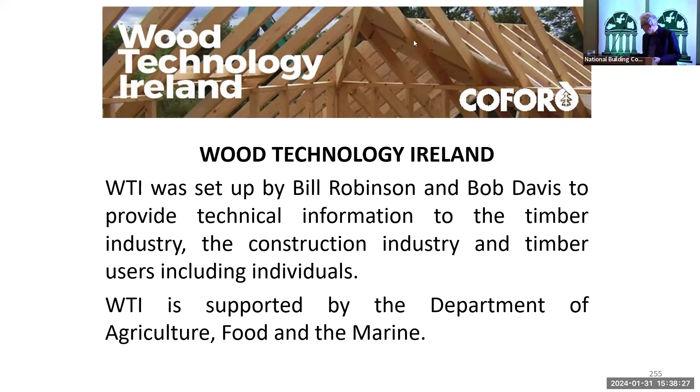Materials testing, including sampling. Sampling is actually quite a bit of a problem. I looked a lot at sampling in terms of plywood, and it's a nightmare. Sampling in terms of testing, it depends on what you're testing for. Are you going to test it for compliance with the harmonized specification, or are you testing the material that's arriving on site? So it's a limited population.

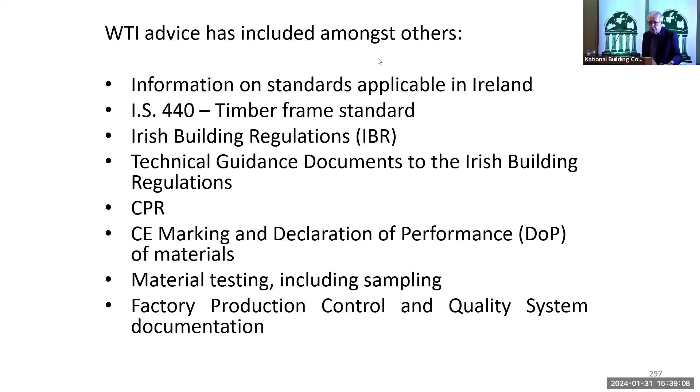Factory production control and quality system documentation is also something we've advised on. It'd be a mistake to think that factory production control will guarantee a product. It reduces the risk of that product not complying.

Factory and site inspections, reviewing the second generation Eurocodes. Well, this is the normal temperature, this is fire design. This is a new thing, all the Eurocodes, concrete, steel, and so on, will have this, which is to do with execution, which I'll talk about shortly. But here are the contact details. And just bear in mind, we can talk to anybody about anything to do with timber, really, okay?

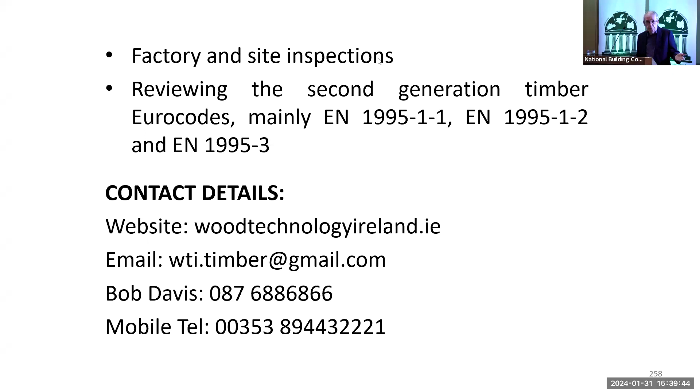So a brief history. Around about 2000 or so, a timber frame study was undertaken by the Timber Frame Housing 2002 Consortium. I think that's the date when they produced the report. TRADA were the main project consultants, and timber frame that's used here is the same as that used in the UK. So they just confirmed what good practice was, as was being used in the UK.

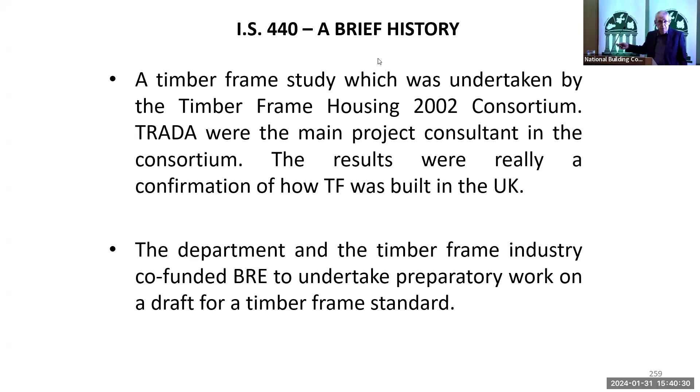The Department of Environment at the time and the timber frame industry, mainly the ITFMA, co-funded BRE to undertake preparatory work on a draft for the timber frame standard that would become IS 440. So a draft was submitted to NSAI, and the working group eventually produced IS 440, which was first published in 2009. So here are, you know, the responsibilities, which is actually quite an important part, but hopefully it will be revised and improved upon when the standard is revised.

Materials are important. It was one of the reasons why 440 came into being. The department were particularly concerned about site practices, which 440 covers, but obviously having a limited standard would not be good in the context. There's a lot behind timber frame because it's prefabricated. It has to be designed, has to use the right materials. Construction details here are important, and site work also is important. So manufacturers are there as well. So just concentrating on site work would not guarantee a good building.

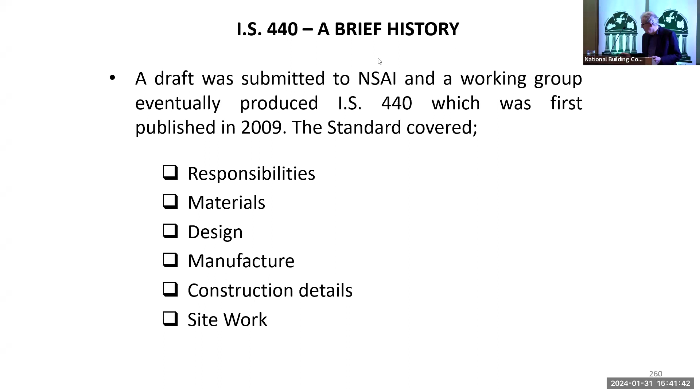Again, materials are very important. Services were introduced, mainly dealing with service cavities in certain situations, and differential movement, which is where timber, as it dries out, will shrink, okay? So if you have block work, concrete stairs sitting on block work, whatever, there's going to be differential movement. So you have to cater for that, which 440 covers.

And there are ways of reducing differential movement. If you use engineered wood joists like steel web joists or I-joists, you're going to reduce the amount of differential movement. Controlling the moisture content of the timber will also help to control differential movement.

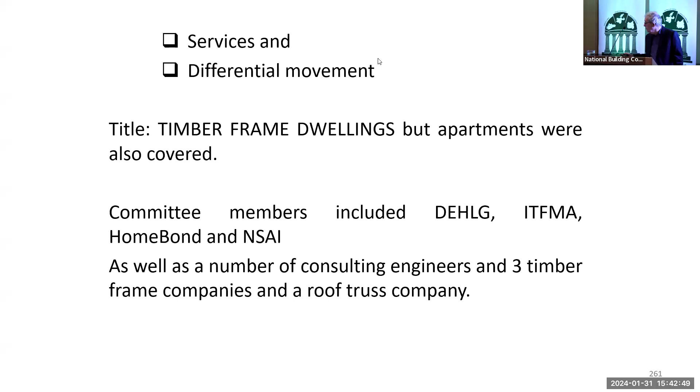The title of the 2009 document is Timber Frame Dwellings, but apartments are also covered. And the committee members included the Department of Environment, the ITFMA, HomeBond, and NSAI, as well as a number of consulting engineers, three timber frame companies and a roof truss company. I was involved in that as well, so I would have been under the consulting engineers, presumably.

Scope, this is roughly the scope, and it hasn't really changed that much, okay? It was revised in 2014, but there was only a limited revision. The new one will be similar in scope actually, but it's a platform method. You put a wall up and then you put the floor on, then you put another wall on, another floor, etc., or roof. There are other methods.

There was a volumetric development in Poppintree in Dublin that was tried out, which was from a company from the north. It did have a reputation for volumetric building. I don't think it worked particularly well, but I think also that they had lost their skills in that area. Volumetric looks good on paper, but it takes a lot of care.

Maximum of 60 minutes fire resistance, that's fair enough. The maximum 4 storeys, these come from the technical guidance documents. But certainly the maximum height of 10 meters does. So that's 4 floors, 3 storeys. The maximum 4 storeys is sort of a natural limit, because once you go above that, you're into disproportionate collapse, which has a lot of difficulties trying to obtain in timber.

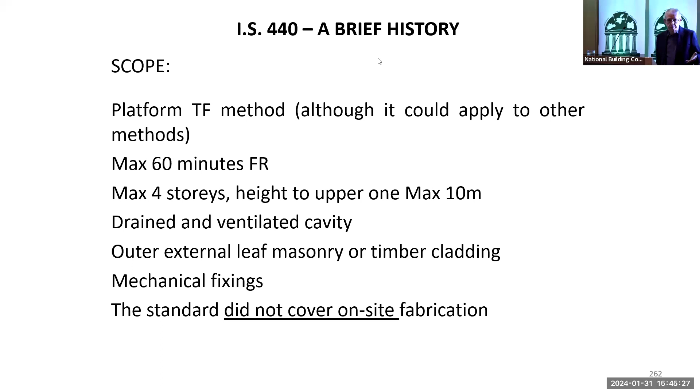Mechanical fixings, there's two ways really, at least in terms of manufacture. There was a draft EN that was proposed, and one was mechanical fixings, which is part 1, and part 2 was for glued panels, which is where the OSB, for example, would be glued to the timber framing. The standard did not cover on-site fabrication. The amount of on-site, stick-built fabrication that takes place is very, very small, and probably unlikely to come to the attention of building control.

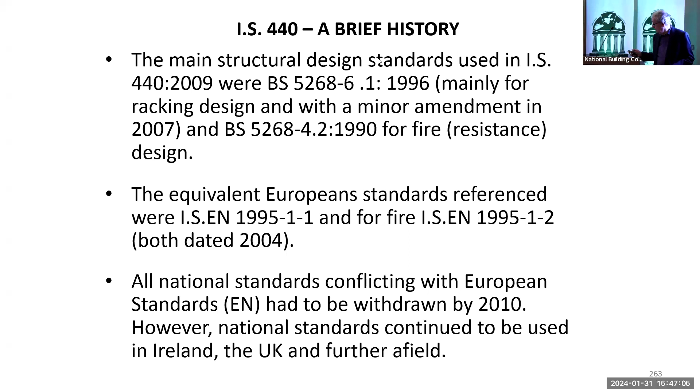The European standards are very good, by the way. The European standards were not really used until about 2013 or so. We actually had to have a meeting with some of the system owners in terms of roof trusses.

Oh, the microphone, sorry.

They were continuing to use designs to the BS, and of course Britain always had this ambivalent attitude to the European Union. So we had a meeting with them and told them that they have to design using the Eurocodes. A couple of the system owners didn't have their software updated to the Eurocodes, but they were given a period of time.

This limited amendment in 2014 removed any of the conflicting standards with the European standards, leaving only valid standards. All standards are supposed to be voluntary, but in reality, of course, they're not. The withdrawn standards primarily were BS 5268, the fire testing one BS 476, and BS 6399 loading. All of these have European counterparts.

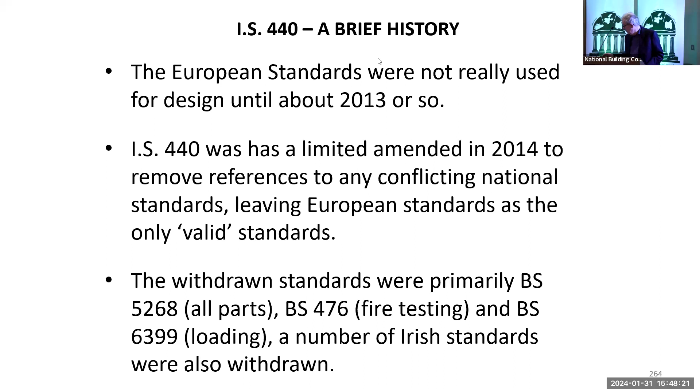There are also a number of Irish standards withdrawn: SR 70 roof trusses, SR 71. These sort of replaced the ones that were withdrawn. The SRs could have come out earlier as SWIFT documents, but because they hadn't gone for public comment, the Department of Environment weren't happy with that. But these are essentially codes of practice, unlike IS 440, which is a full standard.

The difference between a code of practice and a standard is that the standard will say 'shall', a code of practice will say 'should', and we still use that terminology today. In fact, the Eurocodes have been revised. They have other terms like 'may', 'shall', 'should', and they're all recommendations and requirements. So these three standards, including 440, are non-contradictory complementary information to the Eurocodes, because you can't have something that conflicts with the Eurocodes.

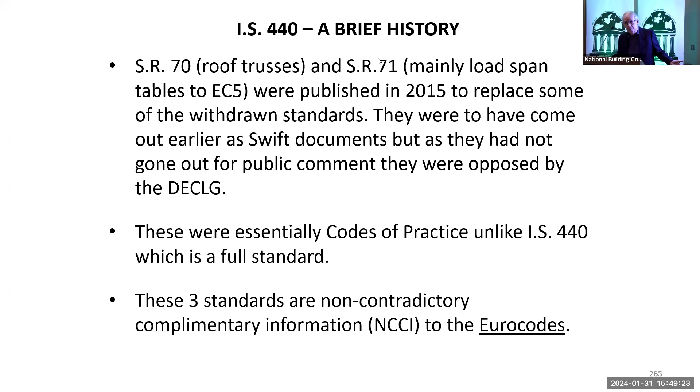But during that work, leading up to the 2014 amendments, it was realized that a larger revision was needed, so that work started and is still ongoing. The CPR required compulsory CE marking and provision of DOP. This is for materials, not for the timber frame per se. So that also had to be addressed, and that sort of slowed things down.

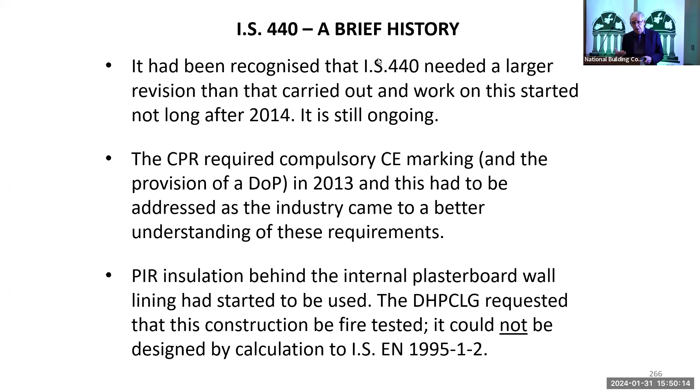PIR insulation was being used by the industry behind the plasterboard lining. So the department then requested that this construction be fire tested. It could not be designed by calculation to the Eurocode, because the Eurocode assumes that the fire lining is fixed timber, and in this particular case, it's PIR.

So work on the standard was delayed while the fire tests were carried out, and those tests commenced in August 2017. With encouragement, the fire tests were extended to cover a range of timber constructions, some of which could have been designed by calculation to Eurocode. Technical Guidance Document B, Volume 2, was published in 2017, and then that had to be looked at.

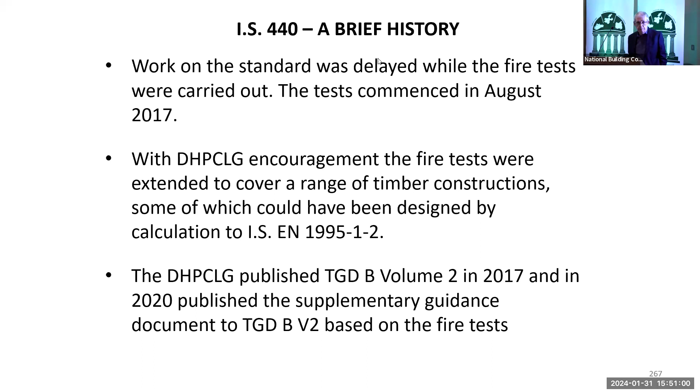In 2020, the Supplementary Guidance Document to Volume 2 was published, based on the fire tests carried out largely by the ITFMA, the Irish Timber Frame Manufacturers Association. The 2020 Supplementary Guidance Document was based on the extensive fire tests, as I mentioned. It collected together a number of earlier circulars and guidance documents based on fire tests - one on walls, trusses, and floors.

The revision of 440 started in earnest around 2019 before COVID disrupted the committee work. NSAI tries to get consensus in its committees, in other words, trying to get agreement with everybody. If it's not possible, then the clause might not be changed in an amendment, or NSAI will have to make a decision not to do something, or to do something.

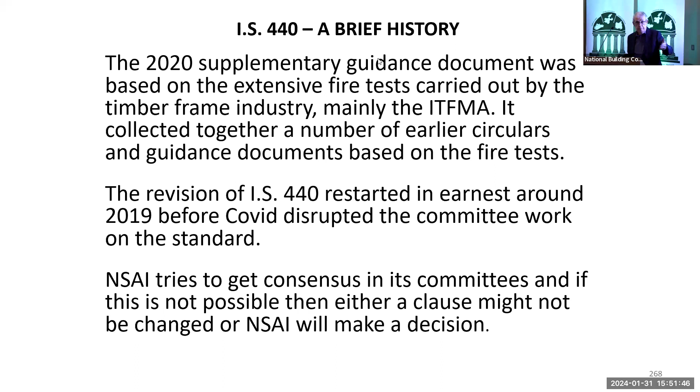The issues discussed with the committee so far in terms of the current revision: a proposal that the standard be amended to support the supplementary guidance document rather than Irish building regulations. The committee cannot agree on this, partly because the fire tests were not in the public domain. It was decided that IS 440 will only refer to the Irish building regulations. It might acknowledge the existence of the supplementary guidance document - it might not, that's in the air.

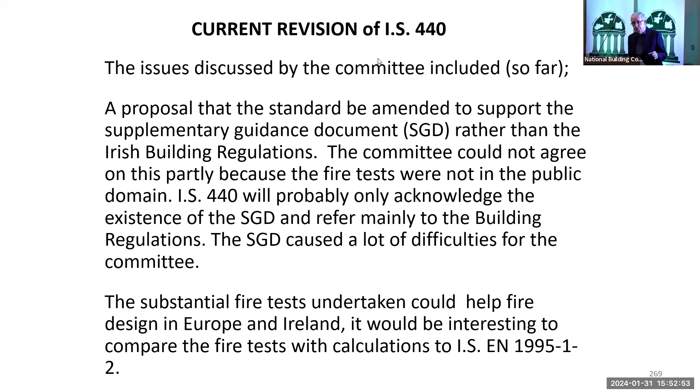The substantial fire test undertaking could help fire design in Europe and Ireland. It'd be interesting to compare the fire test calculations to the EN. There's a huge amount of information there, and second generation Eurocodes, in terms of design by calculation, are based on a lot of fire tests being carried out all over Europe. So it would be good if Ireland could contribute to those fire tests through their release.

The figures in the 2014 version on plasterboard linings were amended to give typical details, largely about information on plasterboard thickness and type of fixings. Originally, the standard did have information on plasterboard fixings, thicknesses, and type and so on. But with this supplementary guidance document there, we felt that we couldn't really do that, so it just gives typical details - it doesn't tell you the length of the fixings, the type of plasterboard, or the thickness of plasterboard.

Fire design by calculation is reinforced in the current working draft, and allows fire resistance to be demonstrated by calculation, fire test, or a combination of the two. This is what the Eurocode says: you can design by calculation, by fire test, or a combination of the two.

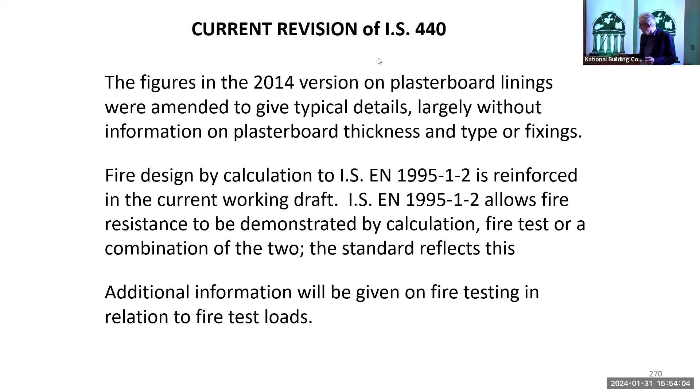Additional information will be given on fire testing in relation to the fire test loads. If you have a steel web joist, it can span 5.5 or 6 meters in some cases, but when you go to fire test it, normally the furnace will only have a 4 meter span. So you need to increase the fire test load so that the stresses in those members are the same for that larger span.

The committee is considering in greater detail environmental issues like carbon dioxide production, and there's this relatively new concept of environmental product declarations and panel recycling and reuse. How far we'll get with this, I'm not actually sure, and I can't really give too much detail.

These are actually quite complicated issues. The people on the committee tend to know more about materials, design, erection, and fabrication, rather than the environmental details.

Timber frame is good in terms of carbon in a number of ways. Not only does it use timber, which locks up carbon, but with timber frame the actual U values are more accurately what you're going to get in construction, because the insulation is sheltered. Whereas if you have insulation in a cavity, any gap between that insulation and the timber or inner leaf of the wall allows air circulation, and your U value will become very, very bad.

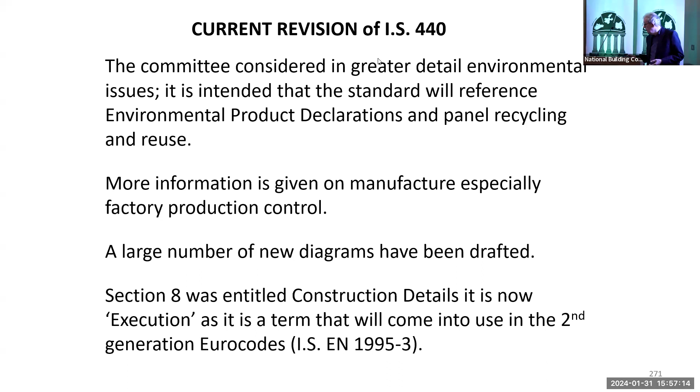This is the definition of execution, by the way: all activities carried out for the physical completion of the work, including procurement, inspection, and documentation thereof. It covers basically everything - this term covers work on site and may also signify the fabrication of components off-site and the subsequent erection on site. That's the definition in the Eurocode, and it's repeated in 440.

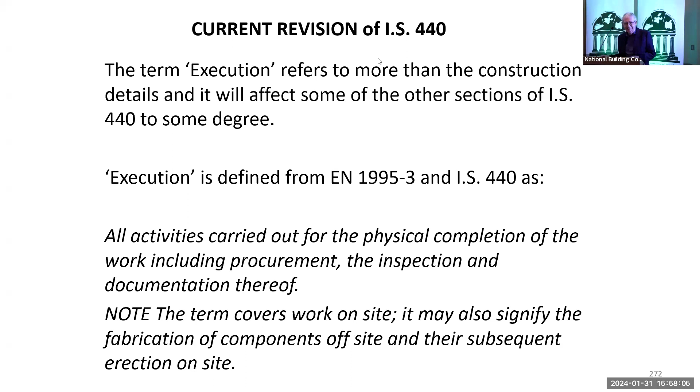I'm not sure what this is going to look like - it's a totally new concept. And of course it'd be there for steel, masonry, concrete, and so on.

The section on durability has been improved. There was a proposal that mandatory preservative treatment of timber framing - that's the studs, top rail, bottom rail - be removed. Soleplates, timber cavity barriers, ground floor joists, and external wall battens would still be required to be treated, so it was never proposed that that would change.

BS 8417, which is a code of practice, gives guidance on the need for preservative treatment, and it's commonly used in Ireland and referenced in 440, SR 70, and SR 82, which covers tiling and slating. It effectively recommends treatment for timber framing. It's quite an important standard to be aware of, because it's a code of practice.

So it can't tell you you shall treat - it says you should treat, or rather it says you should give consideration to treatment. What it does is recommend a natural durability of timber related to its use and to the desired service life. BS 8417 has three desired service lives - I think 15, 30, and 60 years. So if you have a product that only requires a service life of 30 years, you could have a lower natural durability requirement or a lower treatment requirement.

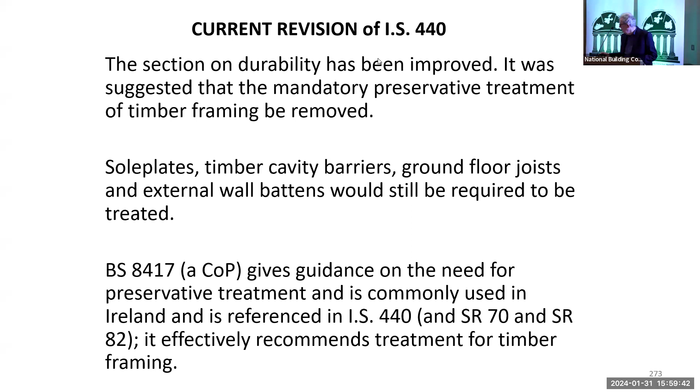While there are some cases where the risk of decay in timber framing is low enough to permit the mandatory requirement to be removed, these would have to be specified in detail and subject to the building designer's agreement. So are there situations where the risk of timber decay is low? There probably are, but you'd have to find what they are. I'd say closed cell insulation would be one part of that, along with increased factory production control, inspections, checklists, and control of moisture content. Then on site, again, more detailed inspections. You can have inspections and supervision - the builder should be doing the supervision and building control should be doing the inspections.

The committee failed to agree on the need for mandatory treatment, so it's not going to change in the amendment. But to address this and progress the standards, to stop us arguing about treatment, it was suggested that Ireland should have its own version of BS 8417, especially since we have no say in it, and it's up for revision at the moment, which we can't comment on. A separate meeting was held to discuss this, but so far nothing has been proposed.

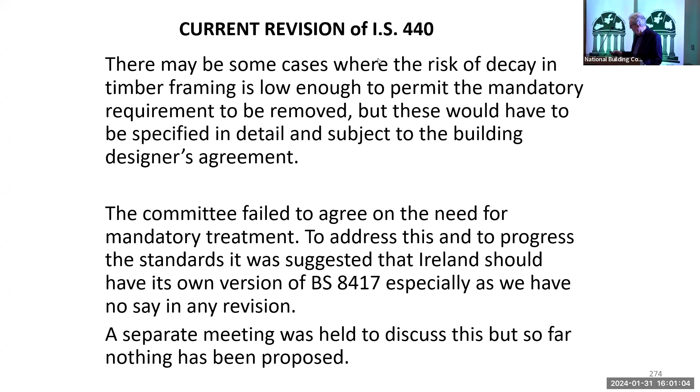There's also the question of cement boards. I think something on cement boards will be included in the standard. There are systems out there - instead of having a very porous brick leaf, you can have cement boards with render on them, quite thin renders, with fixed patterns and so on. So you still have a ventilated cavity. There would be something on this in the standard.

The only thing that would have to be addressed is that there is a standard for cement boards - I don't know if there's more than one - but it doesn't refer to fire. What that means is if a board was used within 1 meter of the relevant boundary, that would have to be thought about, because obviously you have fire exposure from the outside. Although fire exposure from the outside actually has a different fire time curve to fire exposure from the inside - it's intended to be lower, not as severe.

It's intended that the standard will require timber frame separating walls to be made with the fire lining fixed in the factory, which was mentioned earlier. So that's going to be in the standard. NSAI expects a draft will shortly be prepared for working group 23 members for a full review, and they hope the standard will go out for public comment in the first half of 2024. I would be very surprised if it could get out in this time period.

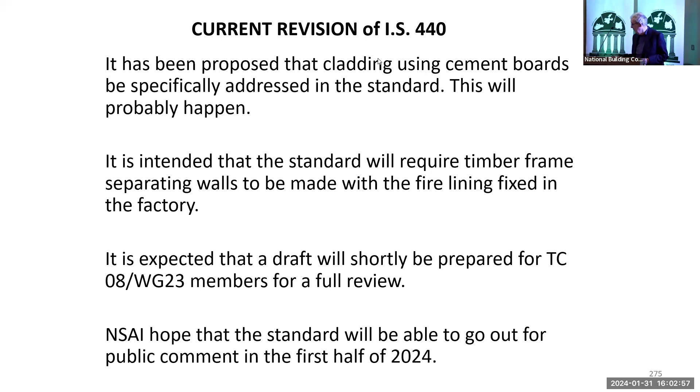There are at least 3 representatives of building control on the timber committees - not just TC08, but also working group 23, which is dealing with IS 440. Building control officers should review the draft standard when it's out for public comment. And to speed up the publication of 440, it would probably be better to submit comments through building control rather than as individuals. Discussions within building control would help this.

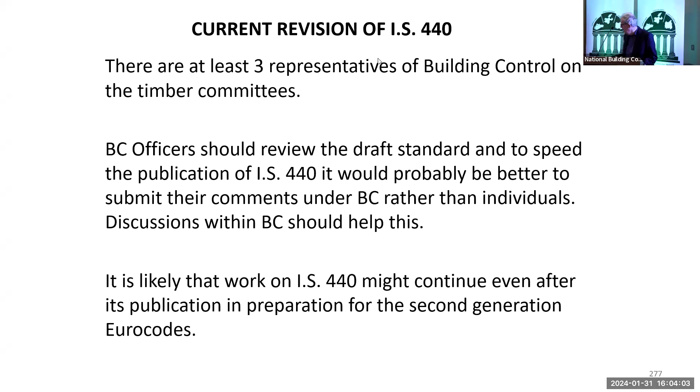Certainly it would be good if the experiences of building control were reflected in 440. There may be diagrams missing, there may be other things missing that building control might want to see in that. And it's likely that 440 will continue to be worked on even after its publication, alongside work on the standards committee in preparation of the second generation Eurocodes.

As part of our Housing for All initiative, the increased use of timber is seen as a way to increase the rate of house construction, but also in relation to reducing CO2 output and meeting Ireland's commitments. It's one of the few environmentally friendly building systems. Mass timber products such as timber frame, glulam, CLT and so on are seen as MMC. The term MMC has been around for probably 20, 30, even 40 years.

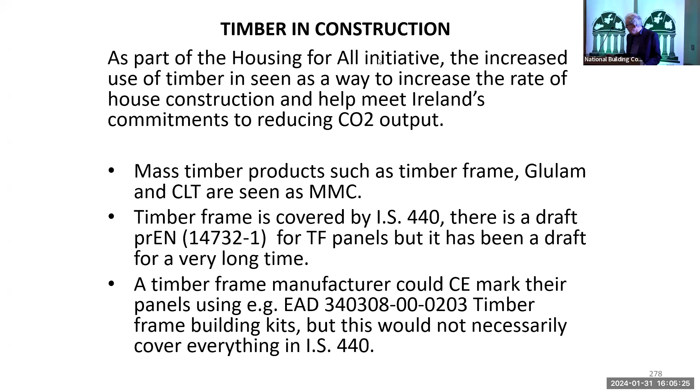Timber frame is covered by 440, and there's a draft PREN 14732 part 1, which has been around for a very long time and keeps getting held up for various reasons. But a timber frame manufacturer could CE mark their panels using this European assessment document. This wouldn't necessarily cover everything in IS 440, because the site work and so on wouldn't be included. But there are an awful lot of European assessment documents, and if a manufacturer gets an ETA - a European Technical Assessment or approval - then they have to CE mark the product, and before the CE mark, they have to draw up a DOP.

So having a product being CE marked and having a DOP can raise difficulties about how that should be dealt with. Glulam has a harmonized specification, but it's a product - it's a product like a timber beam, like a timber stud. So it would probably be inappropriate for it to be required to have additional certification. There might be a problem with Europe in that. Glulam design construction details would not therefore be the responsibility of a manufacturer.

The CLT standard was harmonized, but it was delinked from the CPR, and I think that was a mistake. But again, it could be CE marked through an EAD. One of the reasons why EADs are produced is that a manufacturer CE marks a product where maybe their product doesn't have a harmonized standard, or maybe it's not fully represented by a harmonized standard.

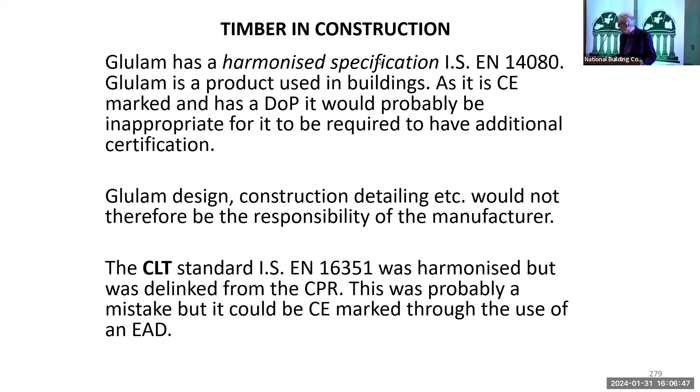So this is a CLT standard, so it gives requirements for the manufacture and design. While CLT has no equivalent to the national standard IS 440, IS 440 at the moment doesn't have a European equivalent. So it's a bit of a strange thing there.

The second generation Eurocodes cover CLT design for normal temperature and fire, and they do the same for I-joists. Any national technical specification for CLT would probably be similar to 440, except manufacture would be covered by the EN. It would take a while to produce any national specification for CLT.

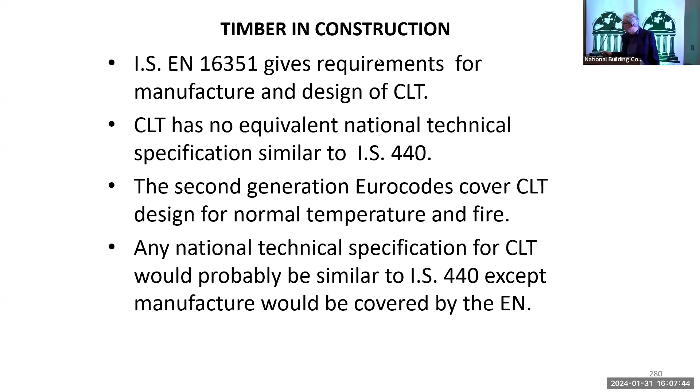But there is work going on in that within the timber in construction working group. So I've already mentioned this.

Roof trusses, which include punched metal plates or engineered joists, all have ETAs and no longer have agrément certs. The system owners - the people responsible for producing the metal plates and the steel web joists - and the design backup, the engineering backup, and the various information showing compliance with building regulations, they do that, rather than having to rely on the agrément board to do that.

So they provide information relevant to the building regulations. I mean, steel web joists and some of these didn't cover fire resistance, for example. They refer to fire tests and so on, but there's no details in this. You can get the details in the documentation provided by the ETA owners.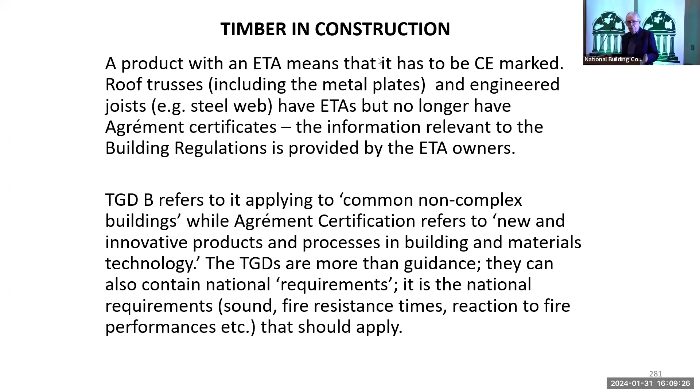But the technical guidance documents also are more than guidance. They actually contain national requirements. They can be in sync in terms of sound performance, they can be on fire resistance and things like that there. So they are a bit more than technical guidance documents. I would have preferred to have seen them as regulations, if you like, and then you could have guidance in terms of how those regulations can be met.

So again, I've referred to that - ETAs don't cover all aspects of the building regulations related to timber, but this applies to other certificates and products.

This question about when should you go and have an agrément cert is quite a difficult one, I think. There are some that obviously should have an agrément cert, and I think possibly this one is one where...

The ITW truss frame, which is really - they would claim this to be a form of timber frame, but it's where essentially you have a framed... it's like a flat roof truss, but vertically, okay? So there's no OSB or any other board for racking, but this is one where even though it has an ETA, it's probably an example where it definitely needs an agrément cert, I think.

Smaller local authorities need support, I think, in this area about whether you need to go and get a fire test, or do you need to go and get an agrément cert. Quite often you get builders being told to go and get a fire test, even where it's obvious to anybody that they don't need to.

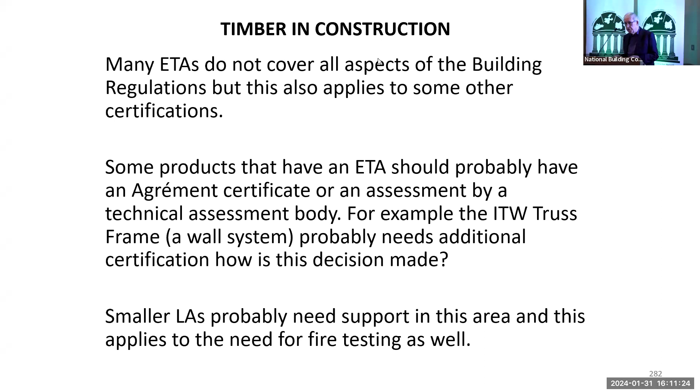An example where there's a one-off house in the middle of a field - the relevant boundary was a long distance away, but they had used timber cladding on the outside. The local building control officer wanted to get that builder to go and get a fire test. Didn't make any sense.

Building regulations are national regulations, and the technical guidance documents are national guidance, but they're not being interpreted the same across the country, even within the same local authority. I've come across local authorities where one building control officer was supportive of timber frame, and another one was totally against it. So I think this is quite important.

And if somebody's trying to build here using CLT or timber frame, and they're coming from outside the state, these are the problems that they face. I think this is probably one of the things about 440. There's an underlying assumption that the timber frame will be built, designed and manufactured in Ireland, and that's not the case. Plasterboard's coming in from all over Europe, probably it'll be coming in from China soon, or God knows where else. So there are aspects of this that need to be thought about a bit more.

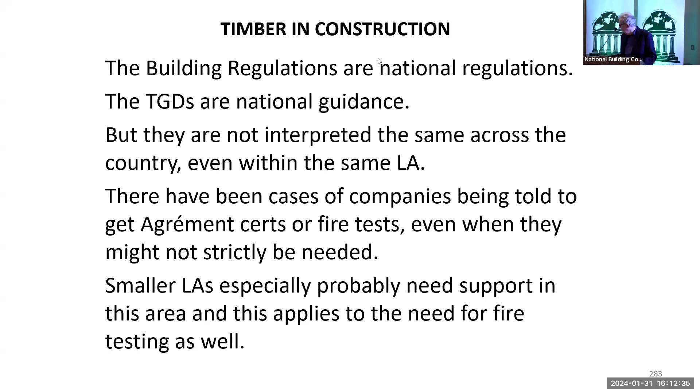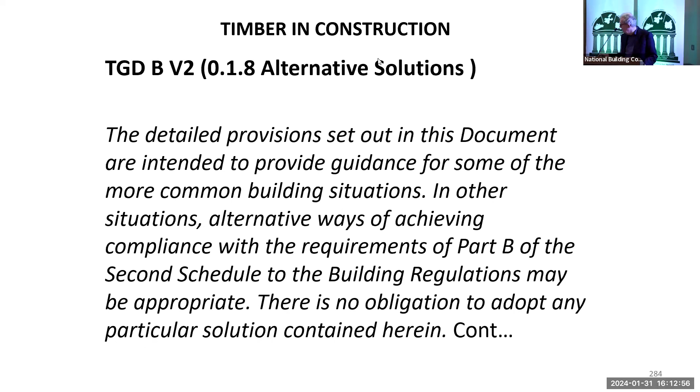So I want to bring your attention to alternative solutions, okay? This is taken just from here. Volume 2, Volume 1, when it comes out - the current technical guidance document will be 2006.

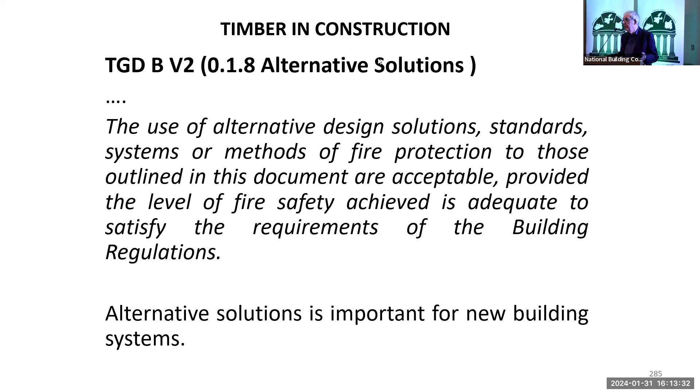It has something similar, but there's no obligation to adopt any particular solution contained therein - the use of alternative design solutions, standards, etc., provided the level of fire safety achieved is adequate to satisfy the requirements of the building regulations. A lot of people forget that the technical guidance documents are not the building regulations, but alternative solutions are important for new building systems. If you're going to go strictly in with some of the requirements in the technical guidance documents - combustibility, limited combustibility, and so on - then you're not going to have new building systems.

The supplementary guidance document to Volume 2 doesn't mention alternative solutions. No - alternative solutions are in the building regulations. They're in Volume 2. They're in the technical guidance document. It's very important that alternative solutions are kept.

They should have that with the same prominence in the technical guidance document in Volume 1 when it's produced, because in the current draft that came out last year, the amount of reference to alternative solutions was tiny. You could quite easily miss it when you're reading through.

The supplementary guidance document requires fire testing, and it appears to overrule Volume 2. I think that's how it would be interpreted - that you can't design by calculation, you're going to have to go and get fire testing.

And when I talk about fire testing as well, this comes to the situation when you look at 440, for example - the scope refers to studs at 600 centres. So if somebody puts the studs in at 900 centres, do you have to go and get fire testing? You can't design by calculation.

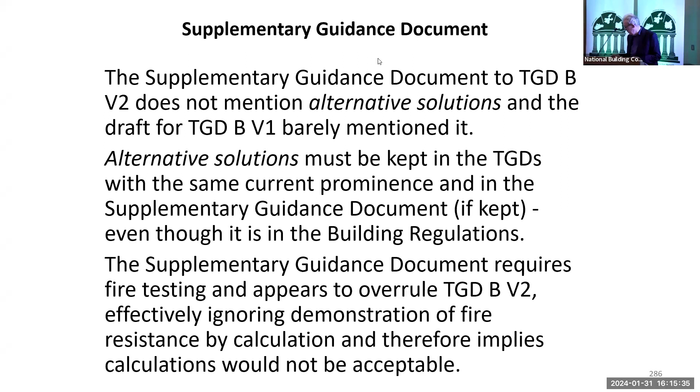This is a concern - that calculations for fire resistance might not be acceptable.

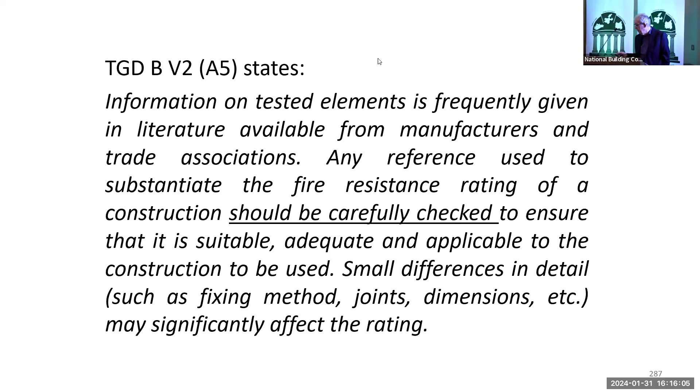And this is what Volume 2 says, and the current technical guidance document B 2006 says something similar: information on tested elements is frequently given in the literature available from manufacturers and trade associations. Any reference used to substantiate the fire-resistant rating of a construction should be carefully checked to ensure that it's suitable, adequate, applicable to the construction being used - a bit like a DOP. Small differences in details, such as fixing methods etc., may significantly affect the rating. So this is the problem.

I think that's eminently sensible, by the way. But if you're going to go by the supplementary guidance documents, well, the certifiers and designers cannot check the fire test reports - they're not in the public domain.

But here's another thing: the department has approved constructions and materials - are they now responsible for the use of these constructions? Probably. And I can remember, going back in IIRs and so on, the department was trying to get out of approving constructions and materials. That's one of the reasons why the Irish Agrément Board was set up.

The plasterboard manufacturer would appear to be absolved of any responsibility as well, provided they comply with EN 520, which has got nothing to do with fire resistance. The only fire performance it's got to do with is reaction to fire.

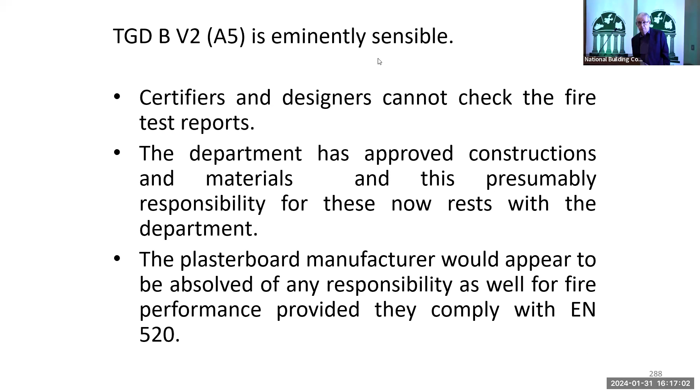So the supplementary guidance document was, well, we didn't have access to the fire tests. So we had to have typical details in 440, which is not ideal. But 440 also does allow fire resistance to be demonstrated by calculation, as the Eurocode does. So 440 reflects the Eurocode.

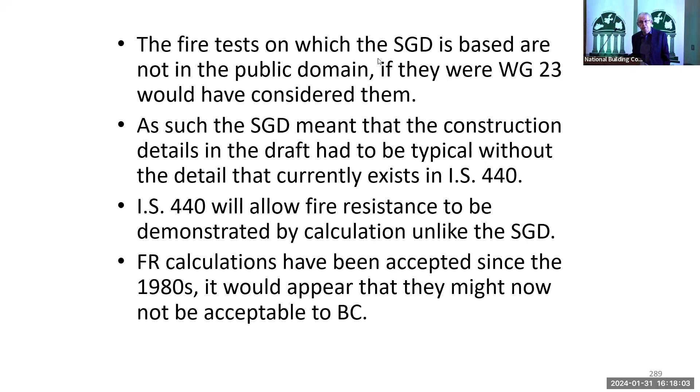Fire resistance calculations have been accepted since the 1980s, but it would appear that they might not now be acceptable to building control. How building control deals with calculations, whether for normal design or fire design, it needs to farm them out to consultants to check. That actually can be difficult; it's probably easier for them to check for fire design rather than for normal temperature design.

and it should be mentioned when Technical Guidance Document B Volume 1 is produced. It should be included in it. It should be included actually in Volume 2. The timber Eurocodes are due to be signed off in about a year.

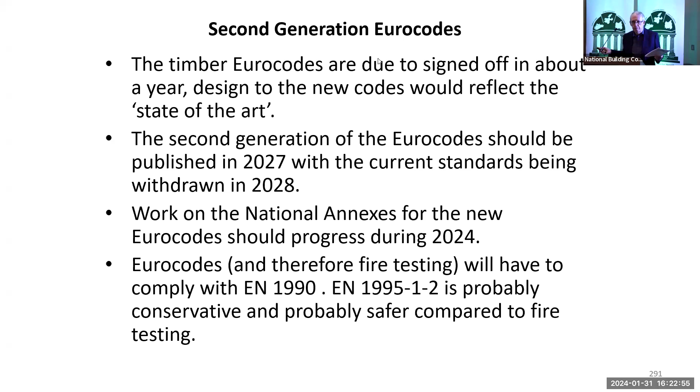So one of the things, just to finalize, is that the new Eurocode has information on plasterboard. There's a very conservative way of design by calculation, and that gives information on failure times of the board and the start of charring rates behind the board, and it's based on fire tests from all over Europe. So you can see that would be safer, rather than making assumptions that Irish gypsum is going to be used or something like that. Anyway, that's it. Okay, so I'll finish there.